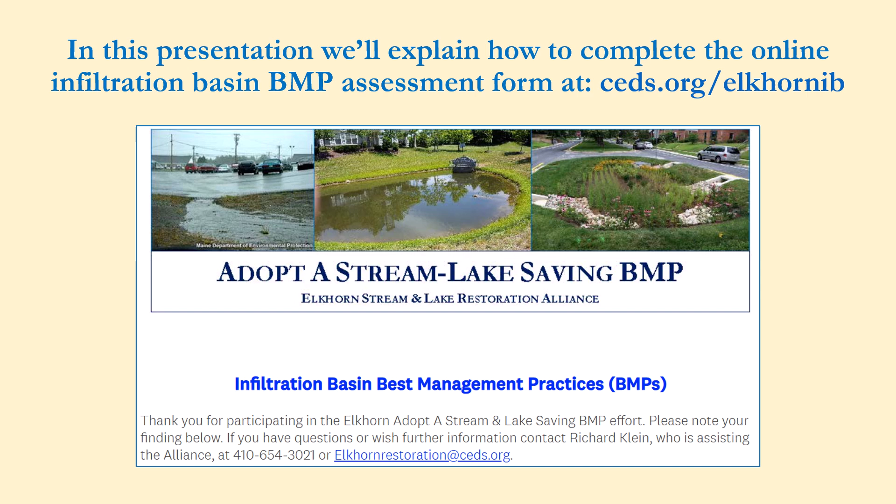In this presentation, we'll explain how to complete this online infiltration basin assessment form. At first glance, an infiltration basin can resemble other pond types. Here you see three somewhat similar ponds. Wet retention ponds hold a permanent pool of water. Dry extended detention ponds occasionally hold runoff for 12 to 24 hours following a major storm. And the dry pond rarely retains runoff.

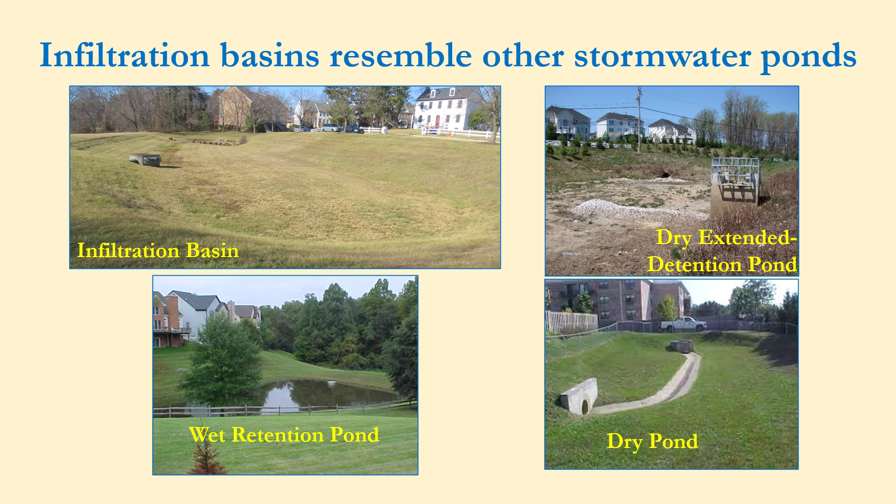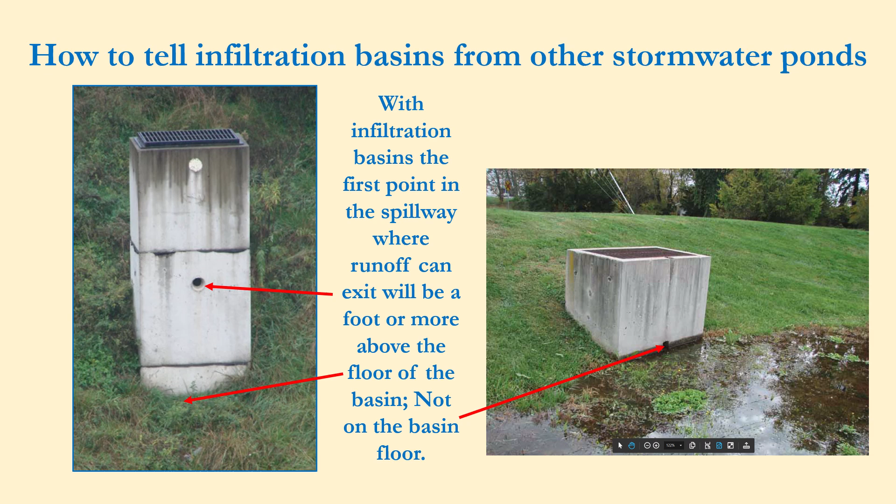An infiltration basin can store runoff for up to 48 hours while it seeps or infiltrates into the soils on the basin floor. Unlike other pond types, the first opening in a well-functioning infiltration basin spillway will be at least a foot or more above the basin floor, as shown in the photo on the left. If the opening is at or close to the floor, as seen on the right, then it may be an infiltration basin in need of cleaning or some other pond type.

To be effective in saving streams, lakes, and other waters, infiltration basins must be designed to treat the first inch of runoff from rooftops, streets, parking lots, and other impervious surfaces. About 90% of all runoff from impervious surfaces is accounted for in storms that generate an inch or less of runoff. This first inch of runoff is stored below the first point in the spillway where there's an opening while it soaks into or infiltrates into the basin floor.

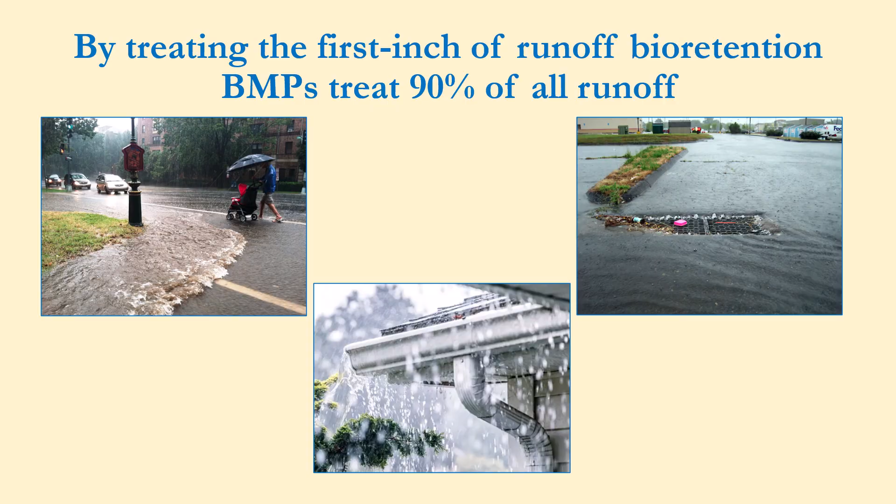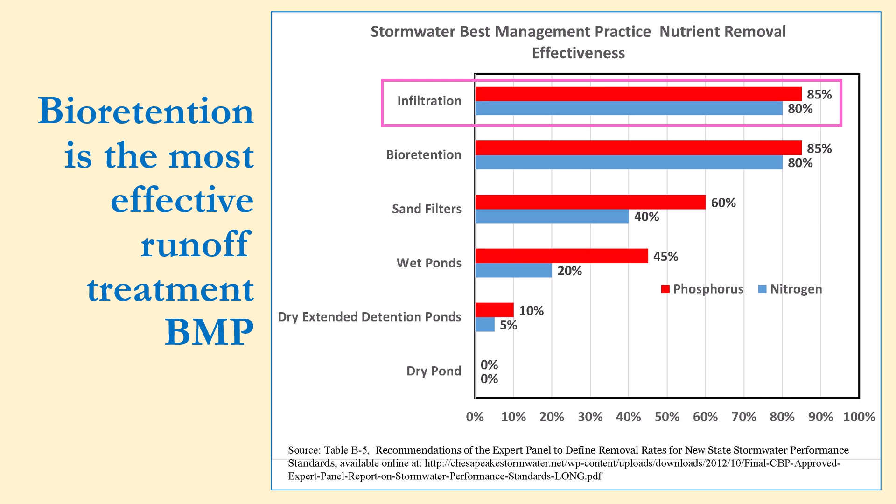Of the four stormwater pond types, infiltration basins are the most effective at removing nutrients, toxics, and other pollutants washed from impervious surfaces with each storm. In addition to keeping pollution out of our streams and lakes, basins and other infiltration BMPs allow the filtered, much cleaner runoff to soak into underlying soils. After traveling through the earth to enter nearby channels, this infiltrated runoff helps maintain dry weather inflow to streams and lakes. By treating the first inch of runoff with infiltration, most stormwater impacts can be prevented provided the basin is well maintained.

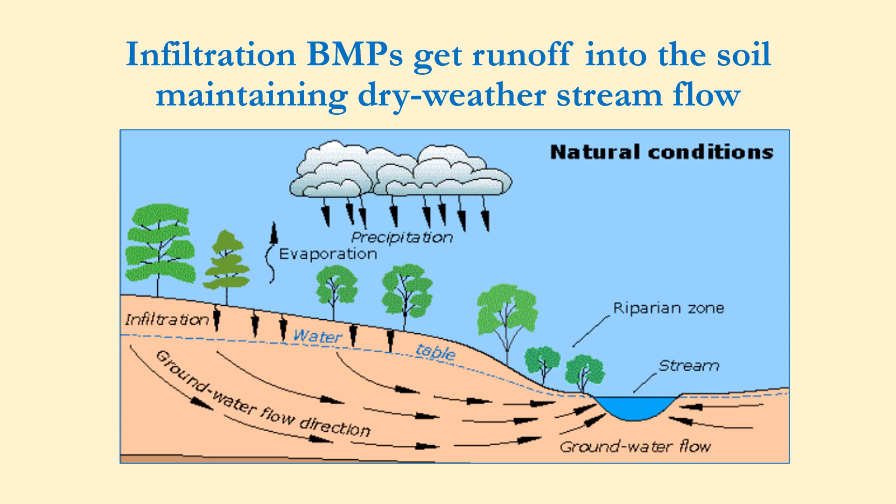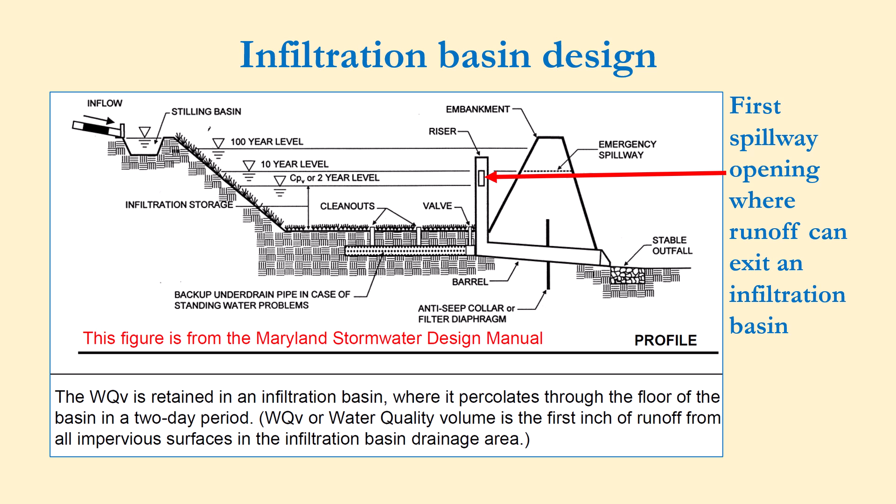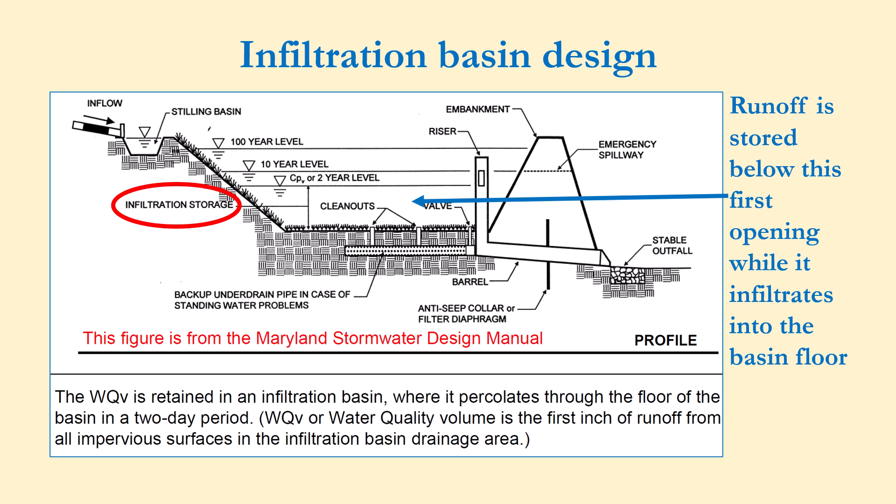To protect streams, lakes, and other waters, a typical infiltration basin must have the components shown in this profile view. As previously stated, the first opening in the spillway must be at least a foot above the basin floor and will frequently be higher. The portion of the basin below this first spillway opening stores runoff until it can soak, infiltrate, into the soils on the infiltration basin floor.

This brings us to the first question you'll find in the online assessment form. Is there at least a foot between the floor of the infiltration basin and the first point where runoff could enter the spillway? If your answer is no, then the BMP may require cleaning to restore original runoff storage volume. If in doubt, then consider using the rain gauge and float method described in question 11 later in this presentation. With this very simple method, you can determine if the BMP has sufficient storage volume to treat the first inch of runoff.

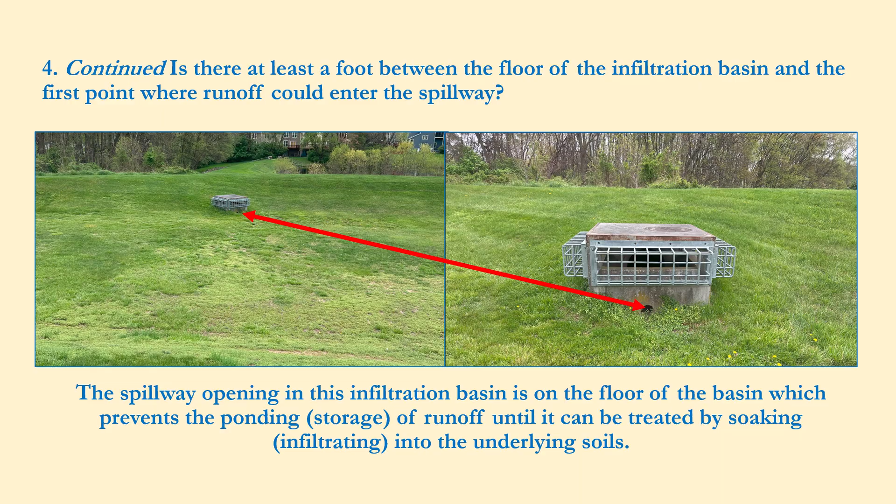The spillway opening in this infiltration basin is on the floor, which prevents ponding to store runoff until it can be treated by soaking, infiltrating into the underlying soils. The runoff stored temporarily in infiltration basins must soak completely down through the floor within 48 hours. If runoff remains longer than 48 hours, then the soils on the floor of the infiltration basin may be clogged.

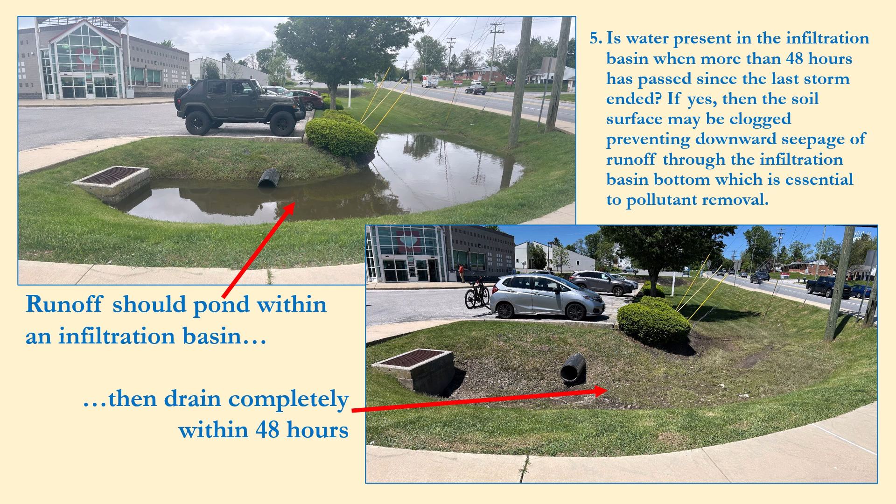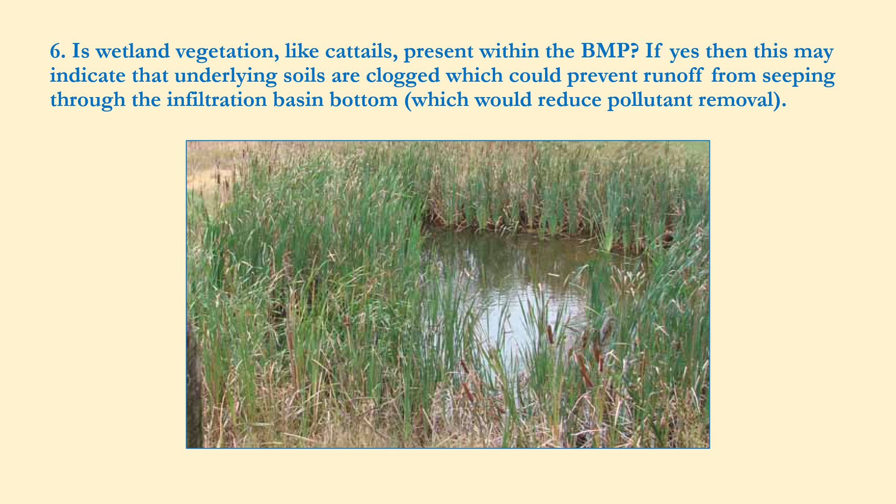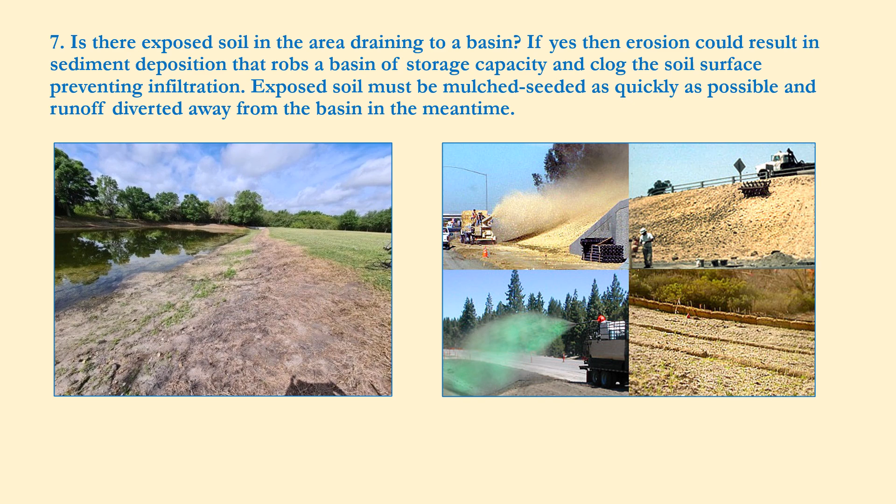Is there exposed soil in the area draining to a basin? If yes, then erosion could result in sediment deposition that robs a basin of storage capacity and may clog the soil surface, preventing infiltration. Exposed soil must be mulched and grass seeded as quickly as possible with runoff diverted away from the basin until a good grass cover is established.

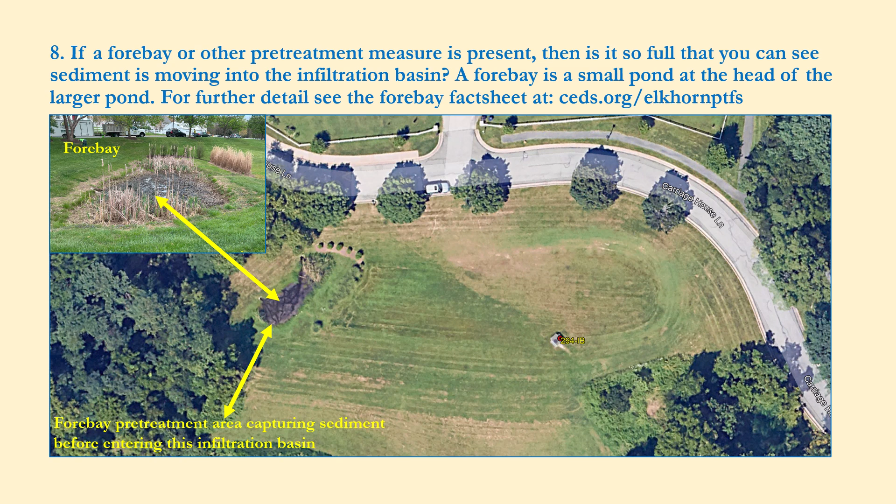Forebays are frequently located at the point where runoff enters an infiltration basin. Forebays pretreat runoff to prevent sediment and other material from robbing a basin of storage capacity or causing basin soils to clog. If you can see that sediment or other material is moving from a forebay into a basin, then the forebay probably requires cleaning.

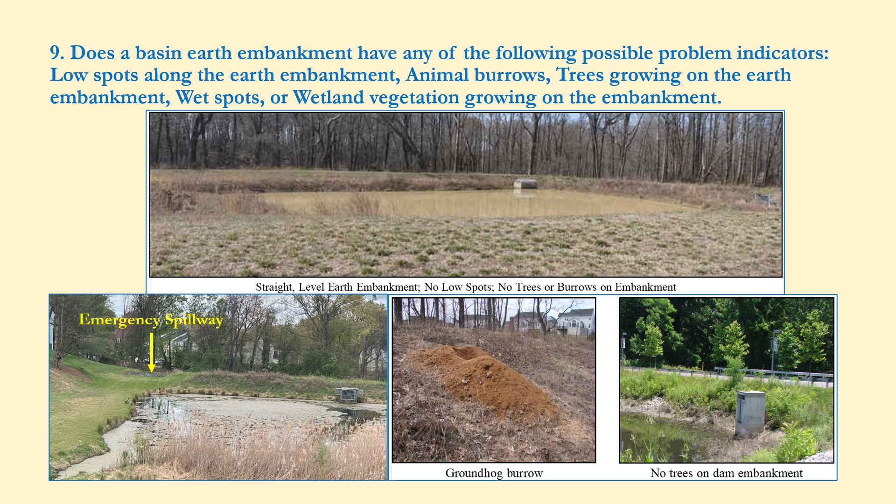Look at the top of the earth embankment forming the basin dam. Are there any low spots other than at an emergency spillway? If yes, then the low spot could indicate settlement, posing a potential threat of overtopping and dam failure. Animal burrows or trees on the earth embankment could also lead to dam failure. Cattails and other wetland plants on the downslope embankment face may indicate seepage through the embankment, another possible dam failure issue.

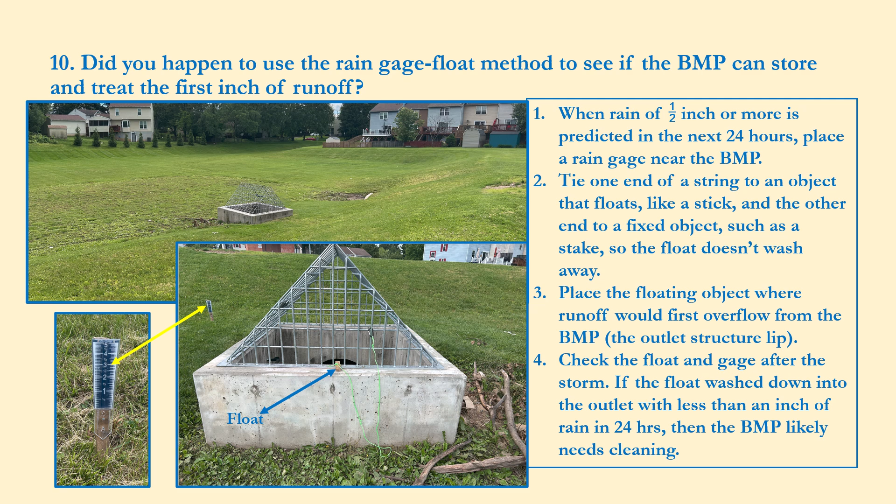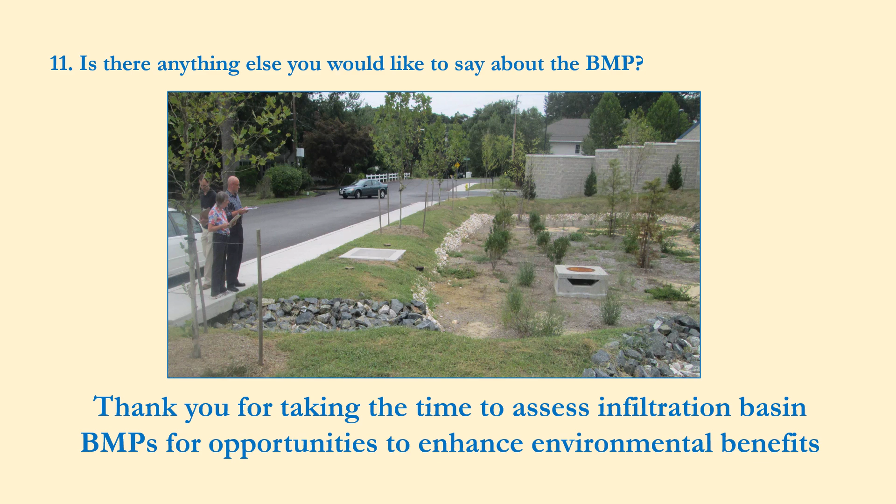If after 24 hours there's less than an inch of rain in the gauge and the float has washed down into the spillway, then the basin is not treating the first inch of runoff. Use the space provided in question 11 to note anything else you observe that might affect the stream and lake saving benefits of an infiltration basin.